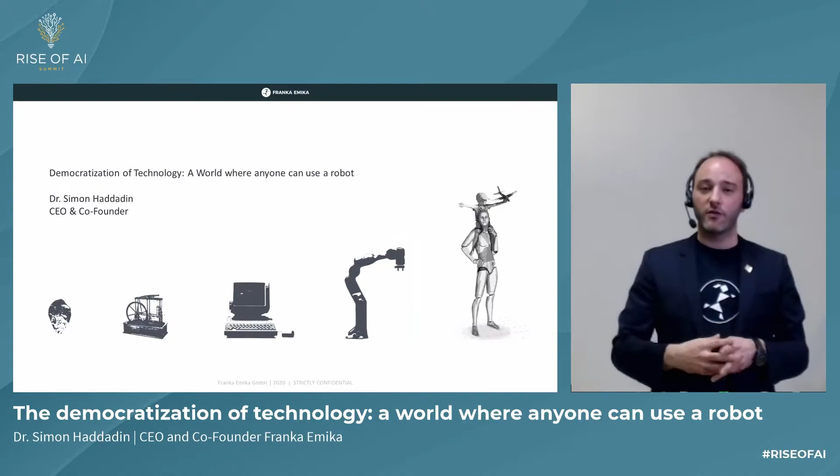And for that, I would like you now to start the video that I shared for you.

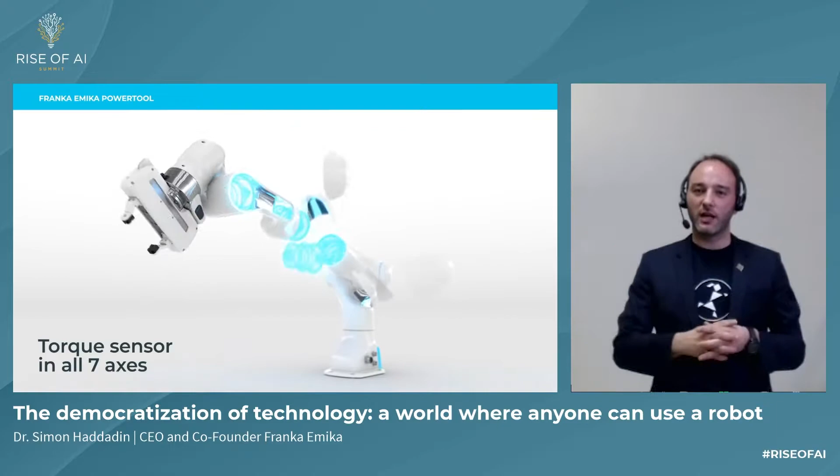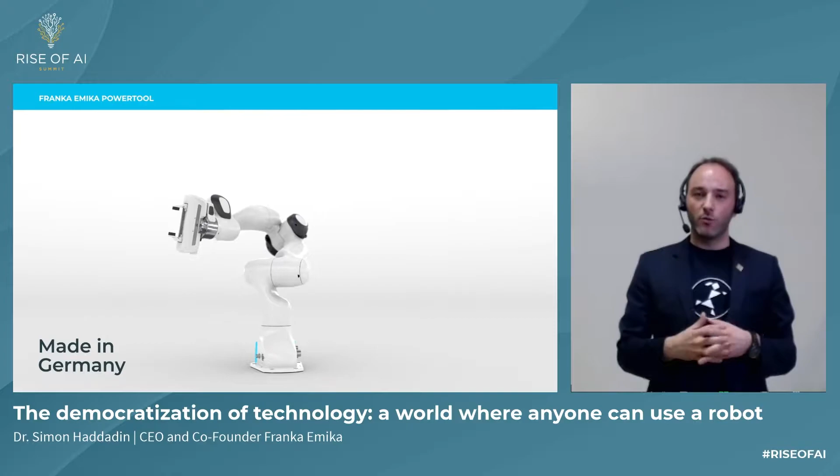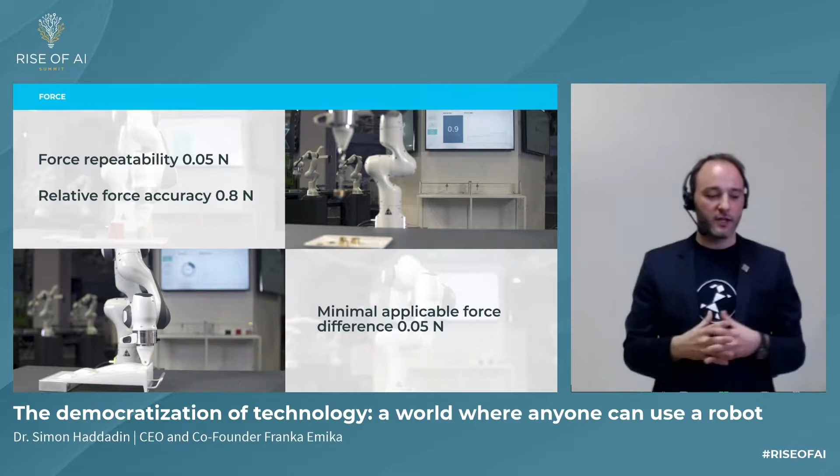It's running okay. So basically, we launched our very first product roughly two years ago, the world's first AI-enabled robotic tool. It has a completely new type of performance, I will show you a couple later. We designed, developed, and manufactured the entire system here in Germany in our manufacturing facility, basically where robots build robots. A robot is no longer a difficult machine that only experts and professionals can use, but we gave it a completely new software stack so everybody can now use a robot even in complex scenarios. The robot system itself is not only a robot, but the extension of the digital world into the physical world, and I'll show you in a couple of seconds what we mean by that.

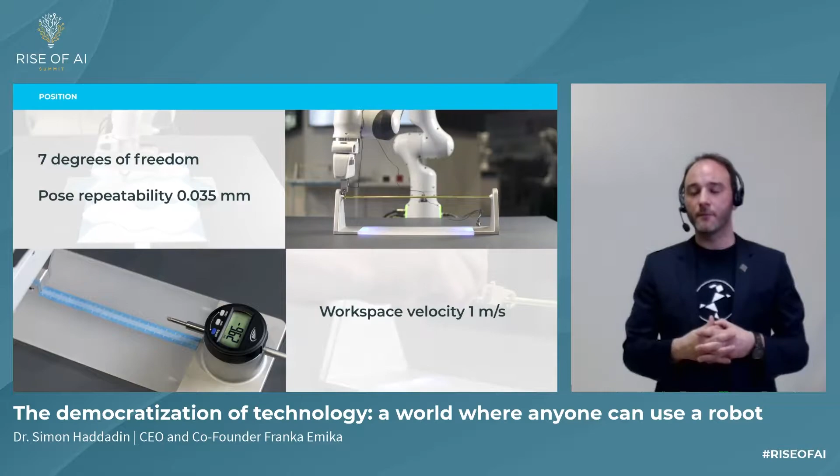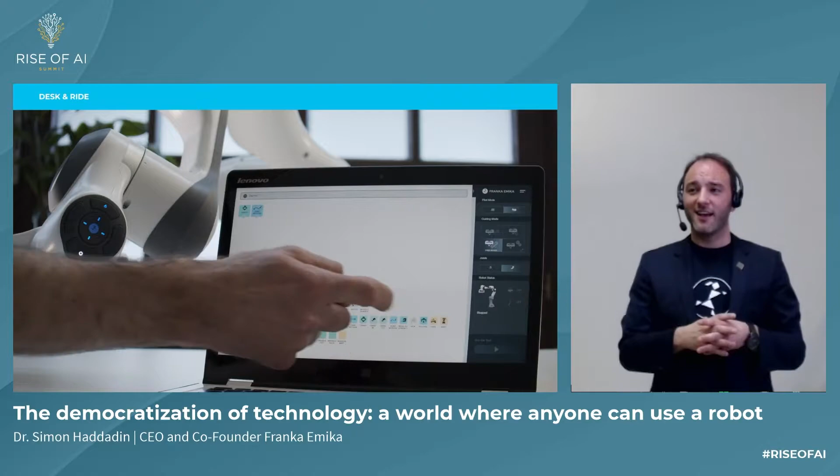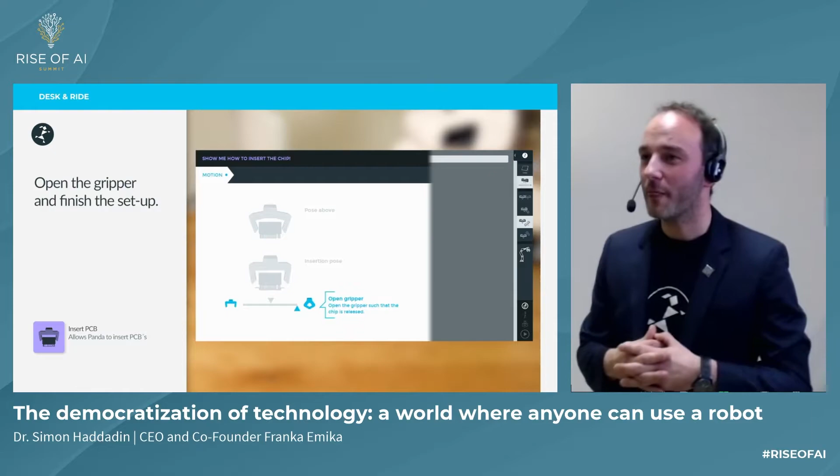When we started launching our product, we did not hear, we almost did not hear anything you were telling us because the sound of the video and the music was quite loud. So if there was important info, next time you should either mute the video or explain what you told us because it was very hard to understand. But the video was great. Okay, so right, I asked to mute the video, it's not a big problem.

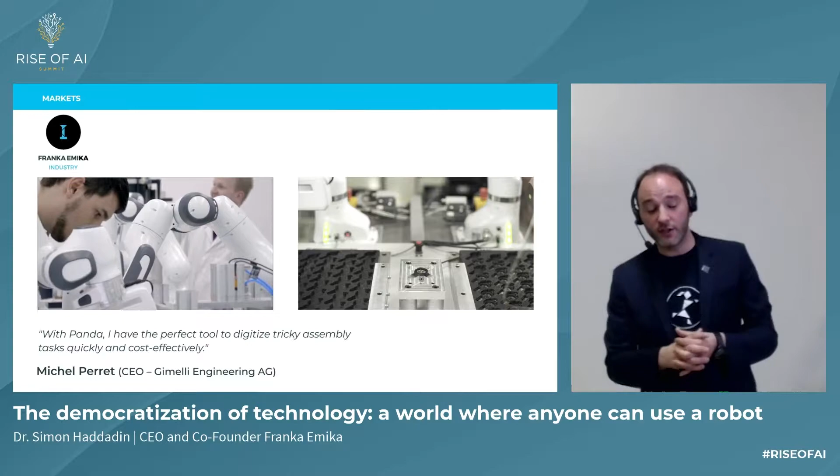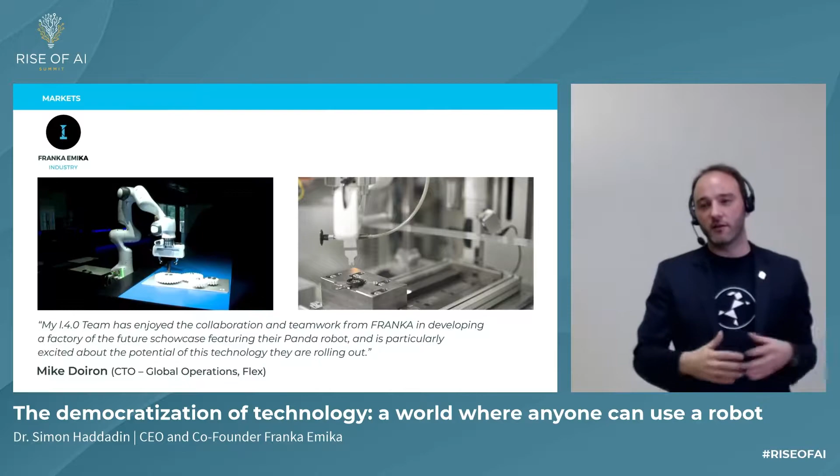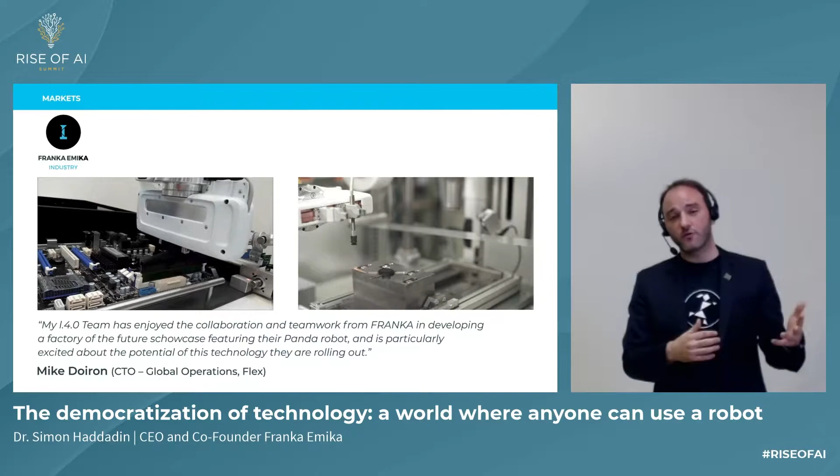So what I said in a nutshell is that roughly two years ago we launched our very first product, the first AI-enabled robot system in the world. We combined our skills in algorithmics and a software operating system with the highest mechatronic density, meaning the robot system is actually learning capable. You do not need to program this robot anymore, you can just teach it by demonstration, or deploy robot apps, which are tasks or features the robot has to do, and you don't need to program anymore. You can use our cloud system, Franka World, and download apps and skills onto your robot system, whether it's here or in Japan, it doesn't really matter anymore. By now, we are engaging with a large community, primarily industry, the disruptors, the educational space, and the academic space. Industry for us, the prime is 3C manufacturing, meaning consumer electronics manufacturing.

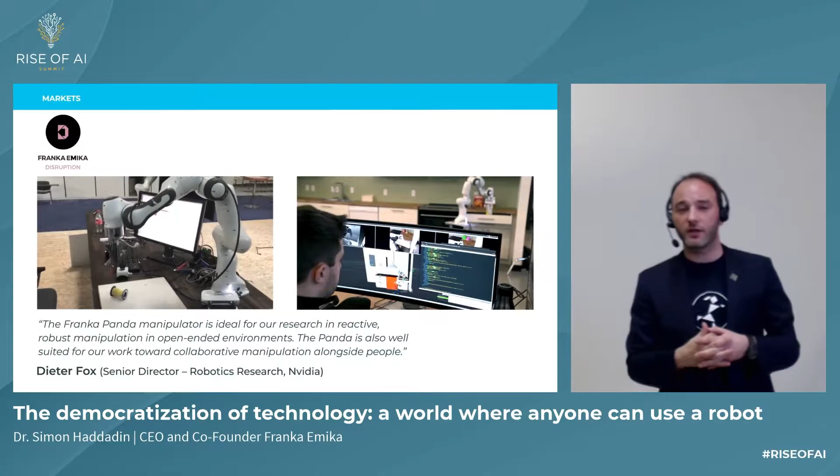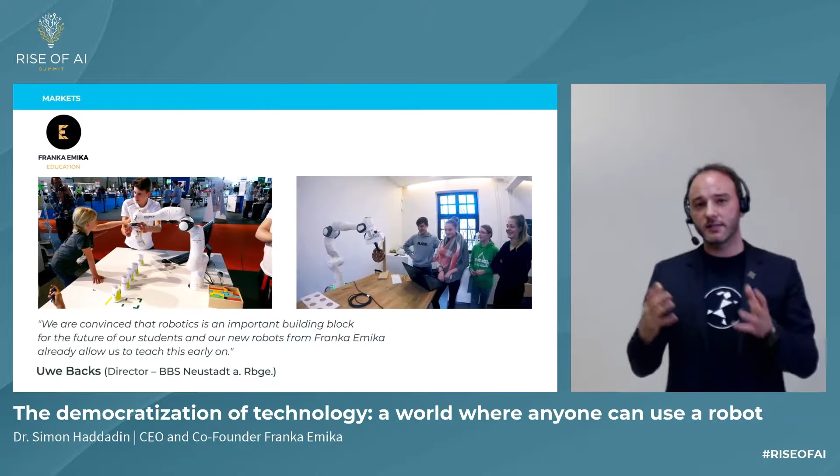Disruption space is basically what we are doing here. People who are trying to give robot systems new capabilities can use the robots for new applications in food sciences, in health, or in finding out how AI works in the real world.

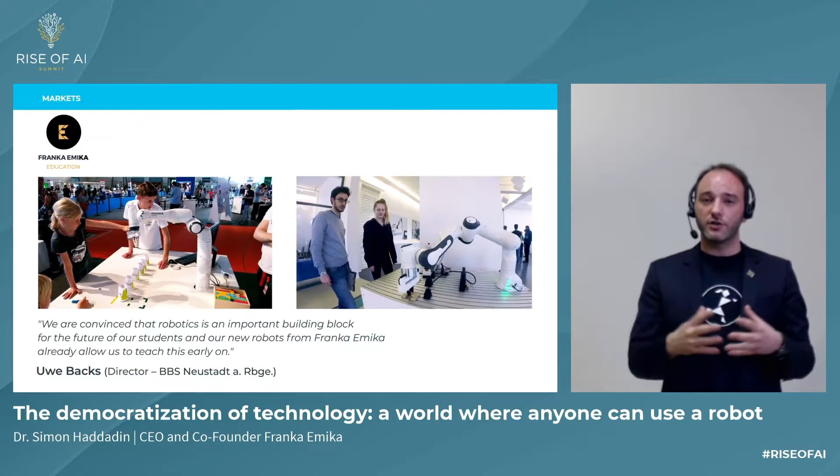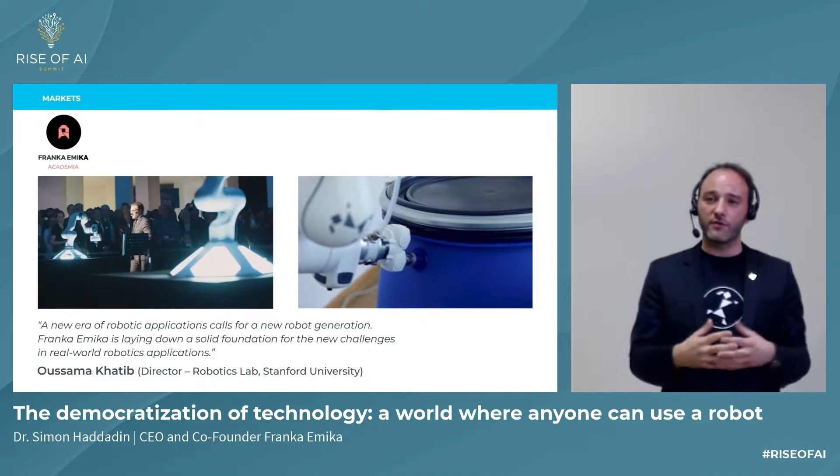Education is also very important for us, as knowledge in robotics is actually very limited. Only a few people have access to robots and to knowledge in robotics. So we partnered with educational bodies and non-profit foundations to bring knowledge of this kind into the general population.

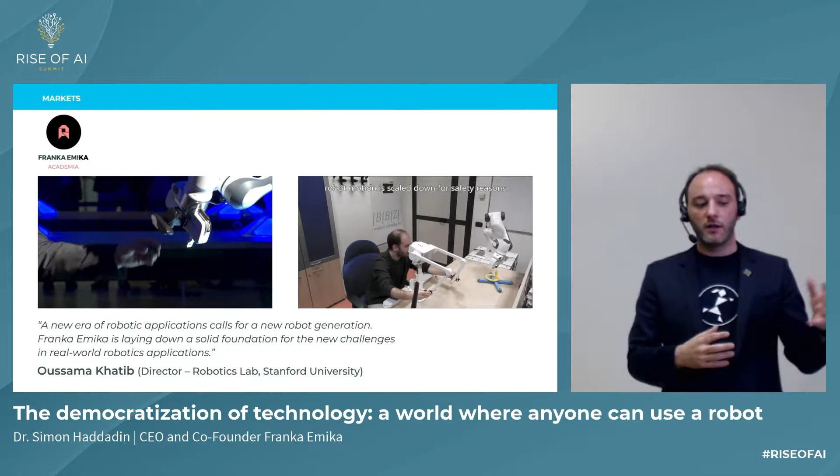And the fourth, the academic space, is basically our influencers, those people who know robotics best, who know control best, who know AI best. By now, the biggest labs like Stanford, MIT, Facebook, Google, etc., are all using our robot systems to understand and learn about AI applications in the real world.

Basically, what we are doing, to put it in a nutshell, is what Apple did in the computer space - that's what we're trying to do in the robotics space.

So what I just mentioned is what we're doing here is basically a fusion of software and hardware technology into a single product, which is very simple for most people, or all people at some point in time, to use. And why do we do that?

And then roughly 30 years ago, Mac or Apple came around with the Apple One, with the idea of a personal computer. By now, we see a world where everyone uses a high performance computer in their everyday life. Now, why is it that robotics is not on the level where computers are?

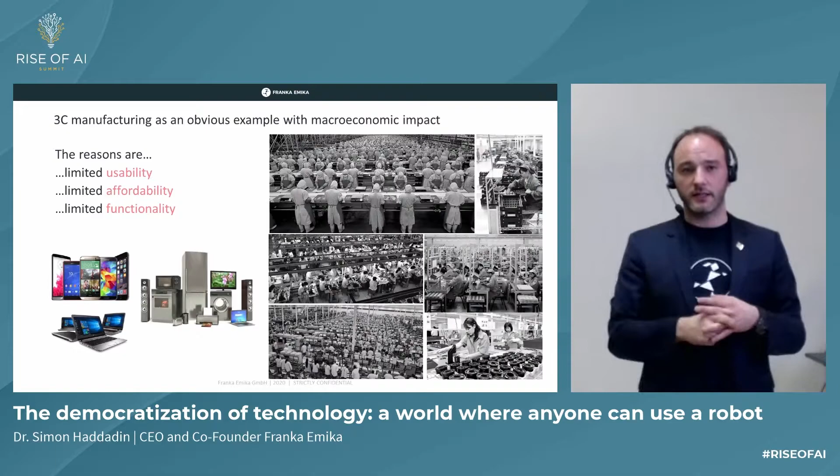And why is it not automated? It's not automated because robots are not usable, they're too expensive, and they're not capable of performing the tasks that a human can perform. And that is why we only know this type of industrial automation.

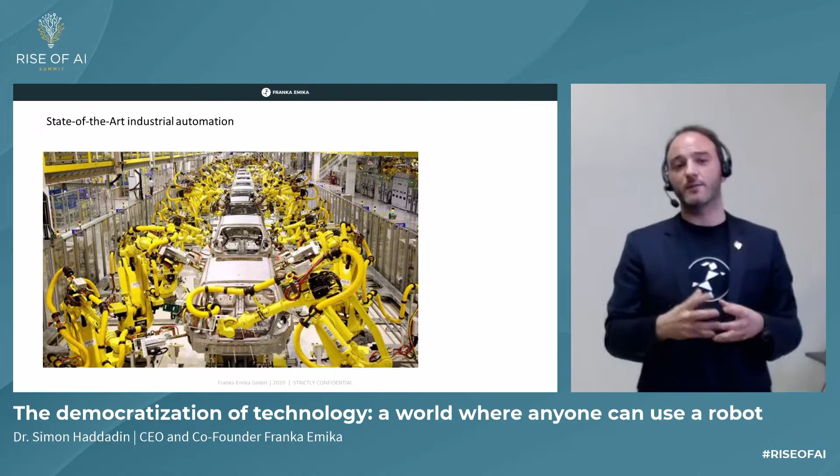Everything behind a safety fence, no flexibility, and those robots can only drive from A to B. They can paint, they can weld, but they're not able to assemble or test or grasp something in their hand. And that's unfortunately one of the outcomes.

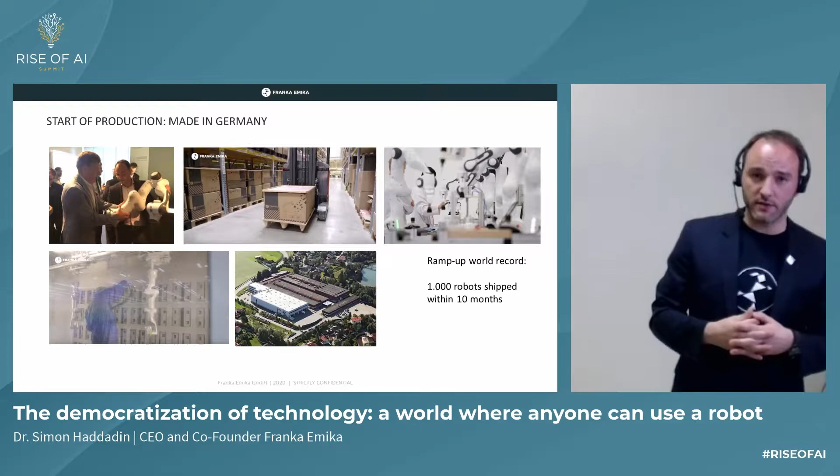What we have done, we basically built an ecosystem here in Germany. What you see there is our manufacturing facility, a former Nokia Siemens facility that we have reactivated.

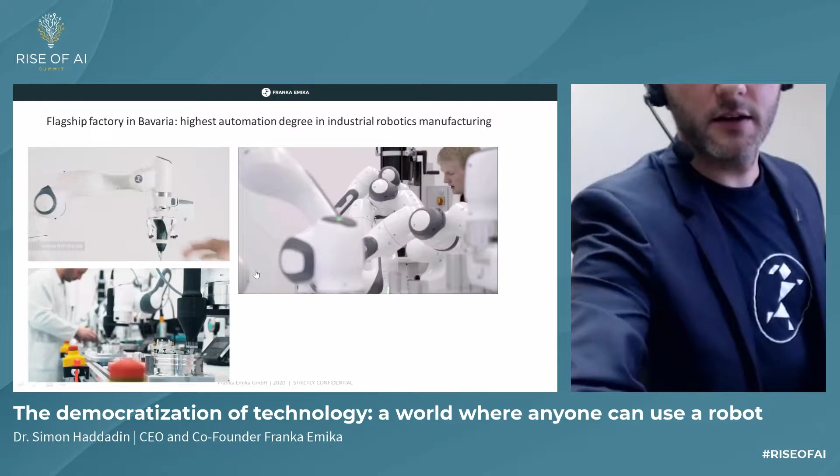What you see here is our manufacturing facility, where basically man and machine are building robot systems in order to be even competitive against low-income countries. We need to automate as much as possible.

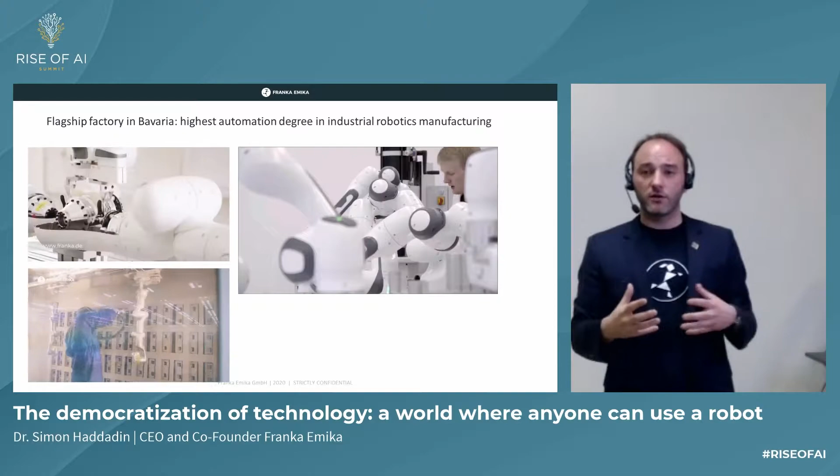Unfortunately, something doesn't work right now. And we're trying to give this technology basically to everyone so that we can deploy automation also here in Europe again, bringing mass jobs back, but only by combining man and machine so we are somehow competitive with low income countries.

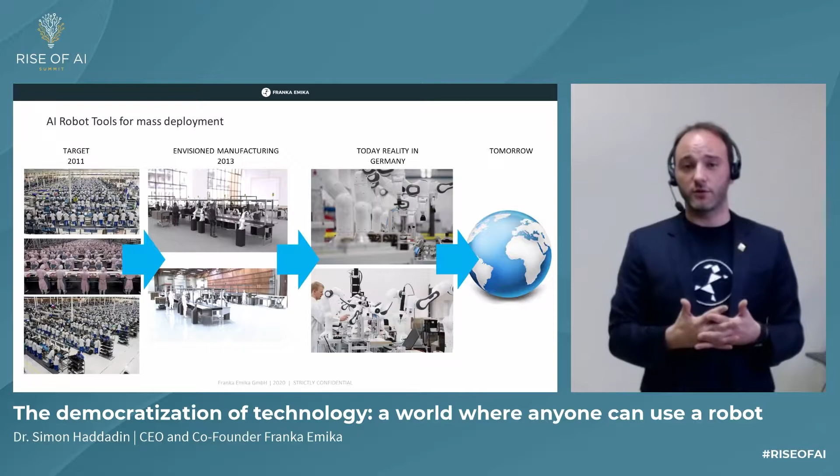Now, what we also know is what has happened over the past two decades or longer in those technologies in AI.

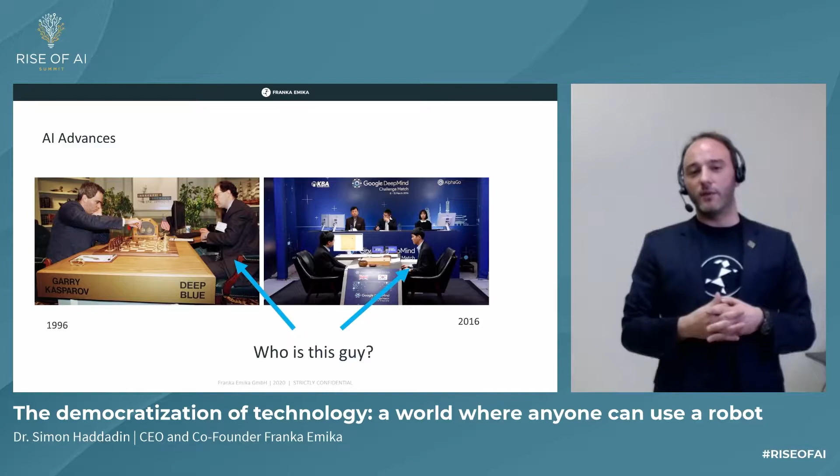But who the hell is this guy? So for some reason, we managed to build a brain that can do better moves than a human, but we did not manage that the system will also conduct the movement. So we put a person, a faceless person, to do the move. All we've managed at some point is exchange the guy who does the move for the computer.

But when we think about AI, all of us still imagine the science fiction movies we have in mind. We're thinking about Data from Star Trek, we're thinking about C-3PO, and we're thinking about Agent Smith from the Matrix. All of them have something in common: we believe AI is actually something happening in the real world.

Even if you take Agent Smith, he only became very powerful when he actually entered the real world and did not remain in the digital world. Manipulating the digital world is much easier than manipulating the physical world, and that's why you go to the next screen.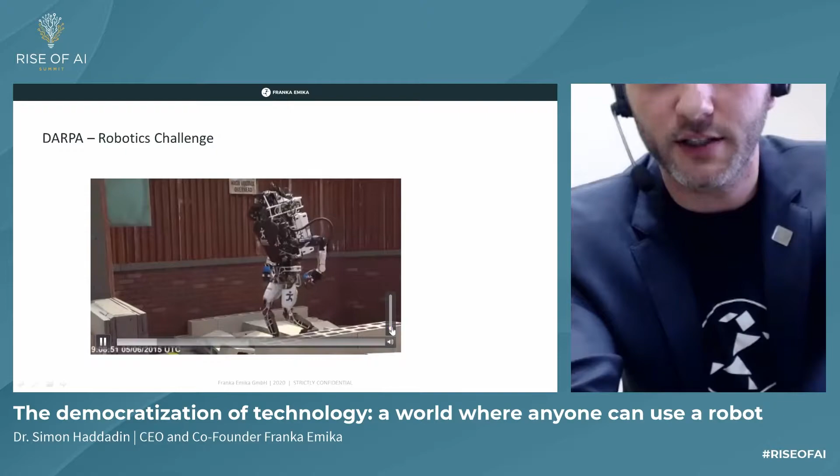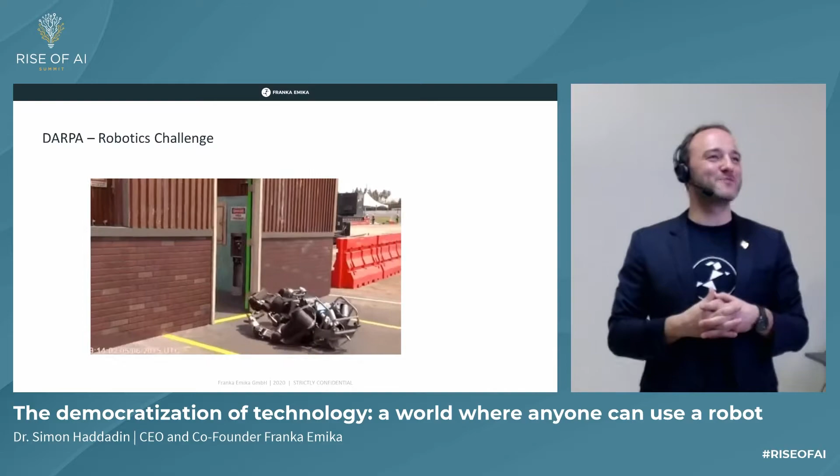So what we see here is the so-called DARPA Robotics Challenge, where we try to solve, with a lot of colleagues from all over the world, basically building scenarios of catastrophic, Fukushima-like incidences where we can deploy robots and sit somewhere in a safe space and control robots and send robots to solve our tasks.

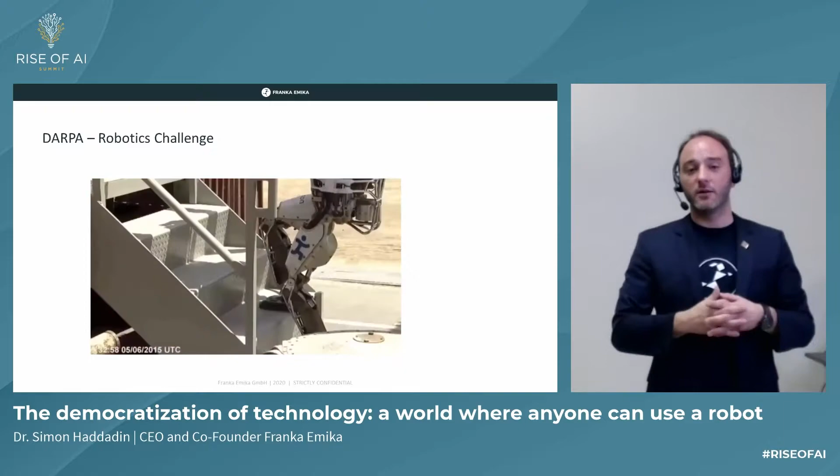But this is what the brightest minds try to solve, and what you see is that they cannot even walk on stairs. And why is it so?

Click what? One more click, please. The sound, I'm really sorry about the sound. We should have tried.

So what you see here now, what is the big difference between mobility and manipulation? I think, as we always try to use the human as a role model, it's the same in this case. What we see here is for millions of years, organisms were able to move from A to B.

But only primates are able to use the world and build tools to manipulate. Manipulation comes from manus, the hand. So only primates are capable of manipulating the world as they want to. And this is what we've been trying to do.

So in general, AI is something like sense, plan, and act. But why is it by now a common assumption that it ends on the screen and it's some major big data computer running in the background? We cannot do the transfer in the physical world, and this is what we are trying to do, and this is what you see here.

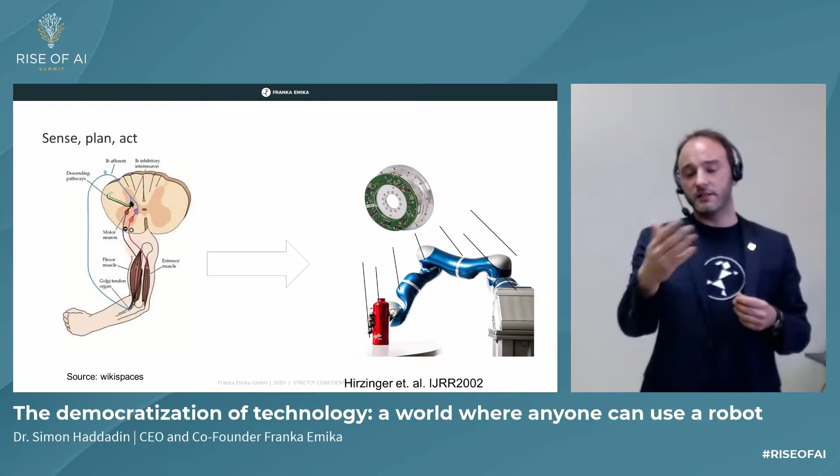The human on the left side with his capabilities, I can feel and I can use my muscles to manipulate the world. And this is basically what we gave robot systems. And why do we do that?

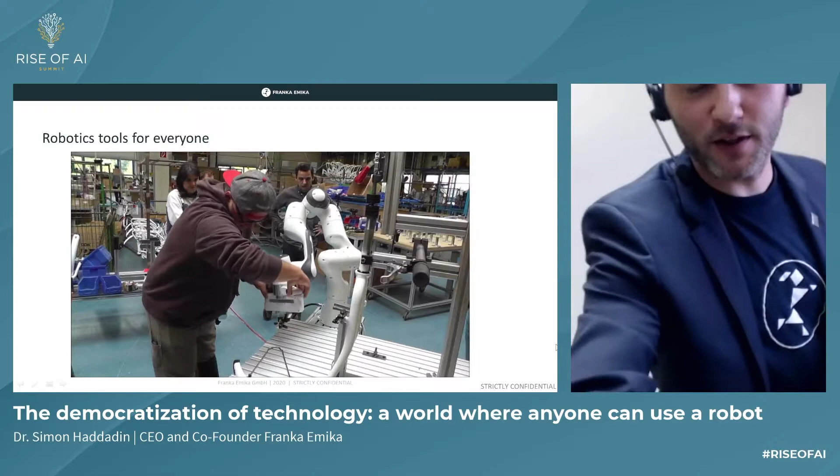Because we want to give another one. We want to give... I'm really sorry about the sound all the time.

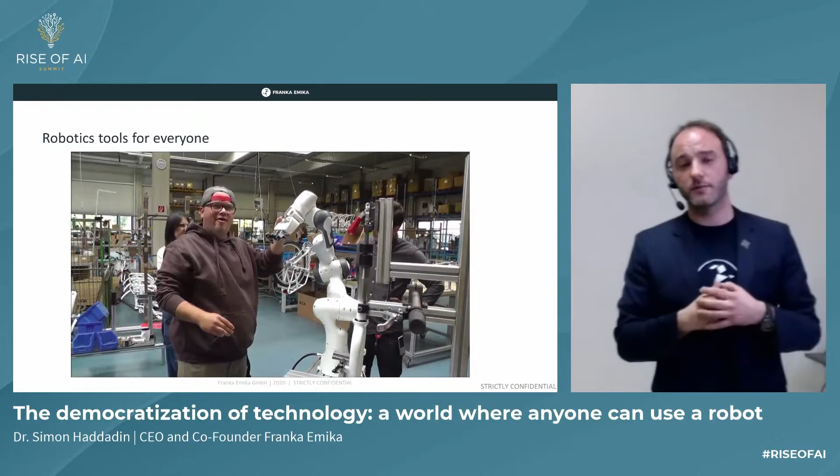So we want to give people a tool at their hand. What you see here is the bike manufacturer Puky, a children's bike manufacturer. In disabled workshops, actually, these bikes are being manufactured, and we can give now even people who have limited skills a robot tool that can help them assemble these bikes.

And what I would like to take you along now is a small demonstration of where we think AI does not end in the digital world, but actually brings it into the physical world. Basically, I will show you 3 steps. We will show you learning by demonstration.

So we can teach a system to do something and the system will conduct it. On the second level, we will show you how a robot system without any knowledge about the concrete task can learn itself how to conduct the task. And the third one is how can I give a collective learning, so the robot system in China, in the US, in Europe, it doesn't matter, can all share the knowledge and bring it onto a single system.

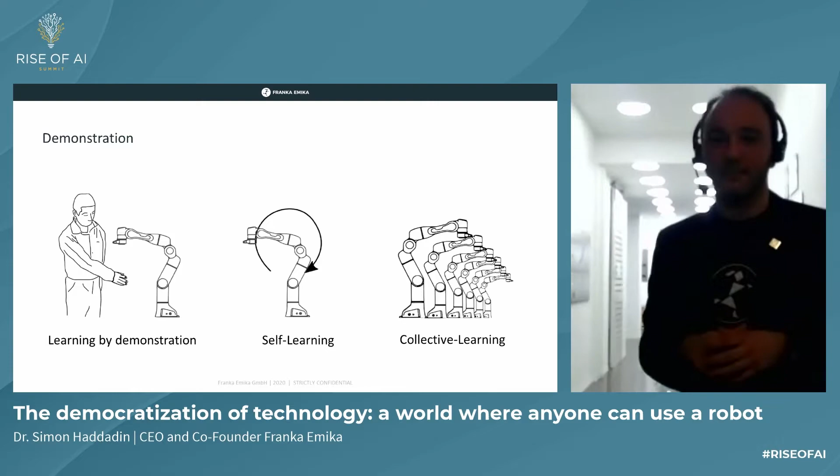And for that, we will go now into our lab. As I said, we wanted to be in Berlin, but we're trying to make this experience as hands-on as possible because robotics is hands-on. I wanted to bring a robot onto the Berlin stage, but we're using our lab for these days. So we are here in Munich, Schwabing, in our headquarters, and this is one of our major labs where we'll show you a couple of applications and skills that our robot systems have.

So maybe you swing a little bit. I hope everybody can see. You can see here a small fleet of robot systems.

This very first one is trying to follow a path. And what I can do, I can interrupt him. And even if I interrupt him, the robot system will still try to follow its path. Can you turn on collision detection?

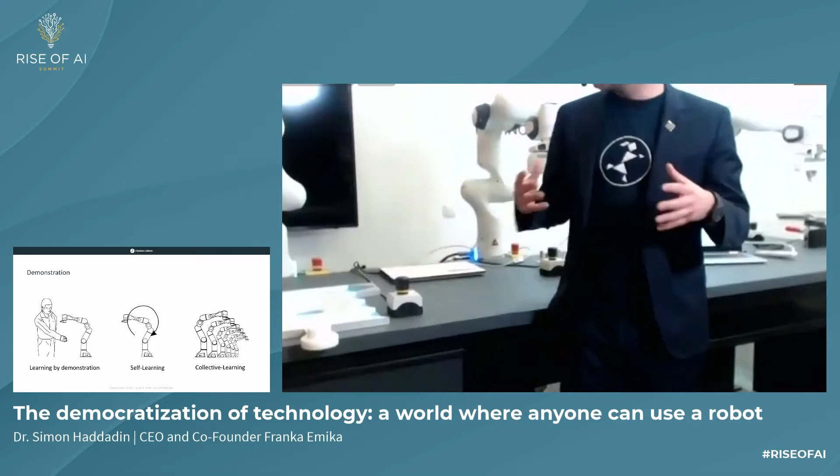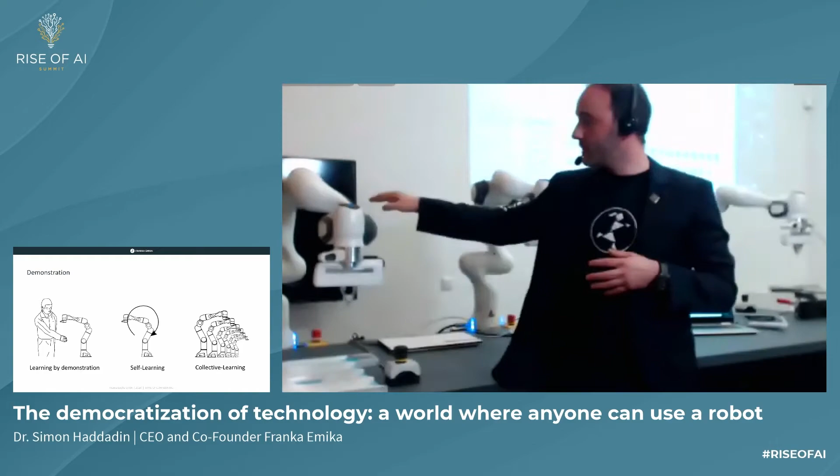One major skill that every robot system needs is to be safe to interact with humans. For that, we basically gave the robot a reflex that a human has: the sense of touch. So every interaction I have with the robot, it can feel.

Can you turn on zero G? Another capability is that this robot is not mechanically stiff, but like my human arm. I can have it strong or I can have it loose. This robot actually weighs almost 20 kilograms, but I can move it with my little finger because the robot compensates its own weight, which makes it very easy to guide and move around.

And why do we need these skills? Sense of touch, collision detection — for manufacturing purposes, we need these things to conduct these tasks. I hope everybody can more or less see what we're having here, but these are typical tasks from electronics manufacturing, and I will show the robot how to insert this plug.

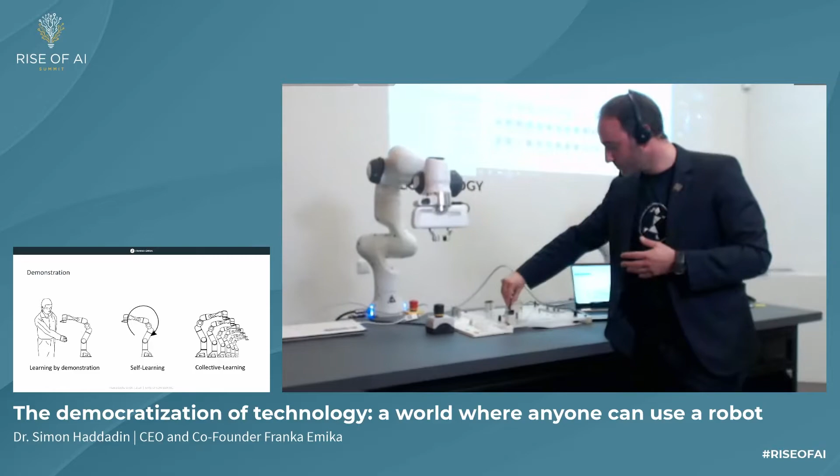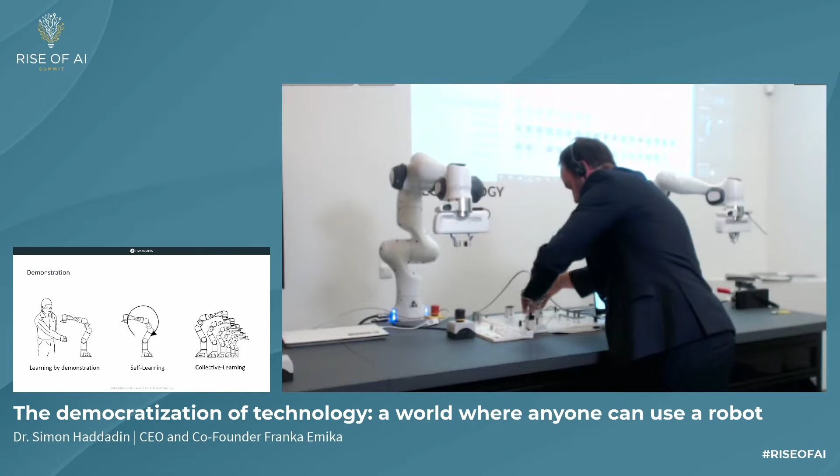Or this plug, and taking them from over here. I'm not sure if you can all see in the background.

Maybe if you lift it up a little bit. I don't think anyone can see it properly, but this is our programming interface. You don't need any code anymore, any special computers — through the browser, we logged in onto the robots. So we don't need any special computers anymore.

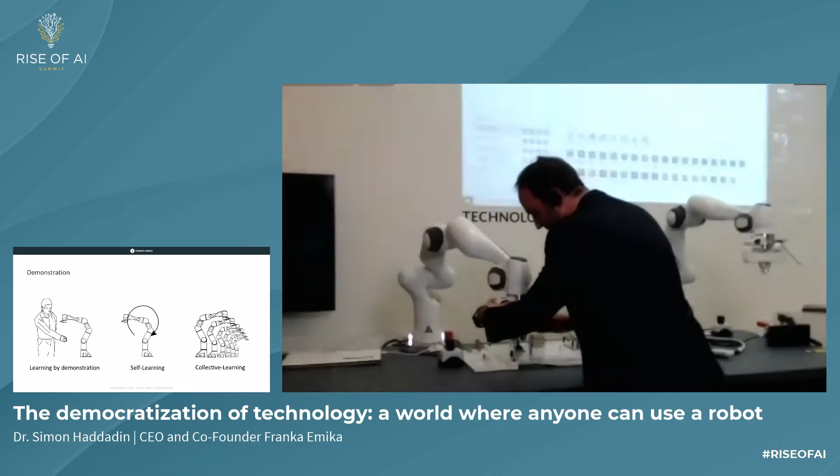What I do now is basically show the robot how to insert this plug, and I will show the robot how to insert this plug.

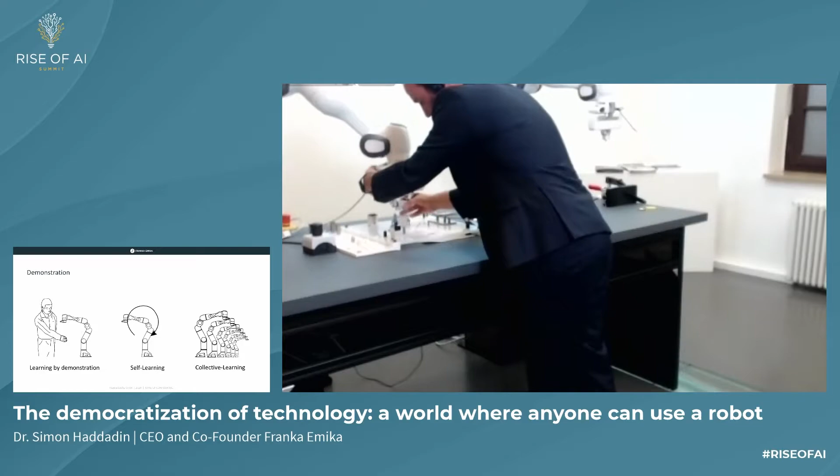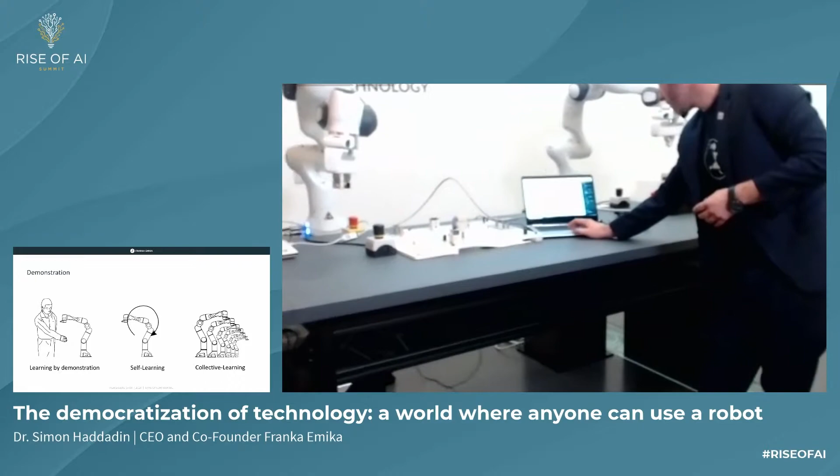Now, if you can, I'll push play. I will put these over here. And what you will see now is that the robot will try to do exactly what I just showed him.

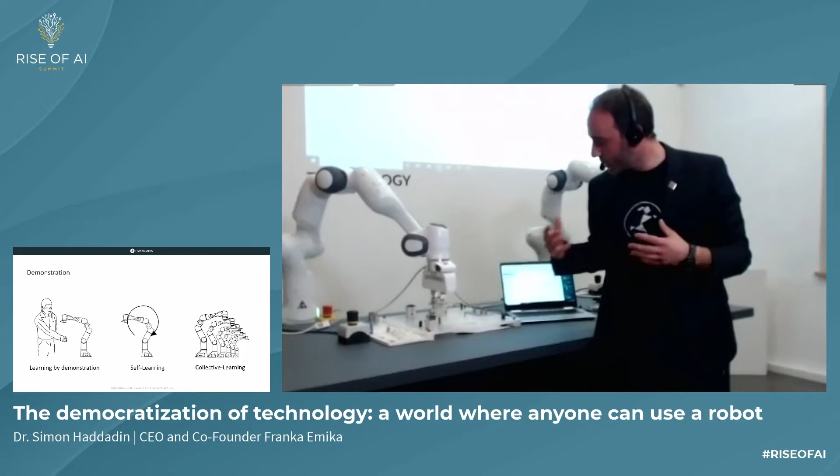He's picking up this very complicated plug. What you will see now is like a blind person — he's trying to wiggle this plug in until he reaches the goal that I just showed him. You can still see those wiggling motions. And now he managed to insert it.

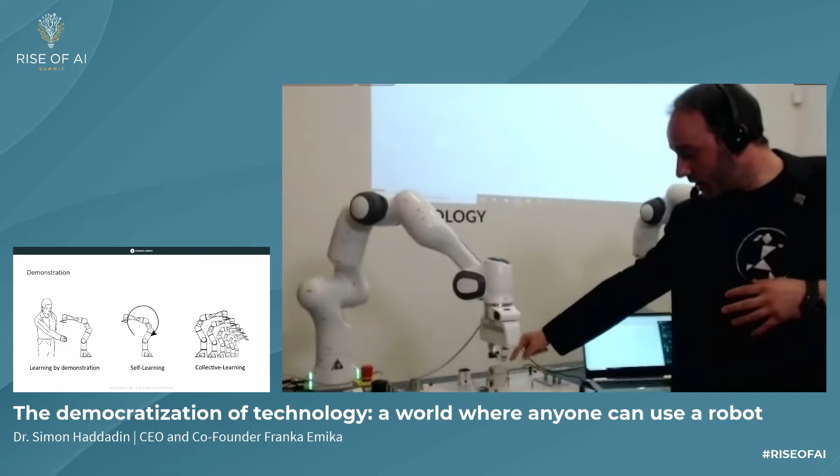So he's moving backwards, and now he's picking up an Ethernet plug. Oops, it just turned off itself. Oh no, now he's... huh?

That's how we know it's live, yeah? Now, where is the Ethernet? There it is.

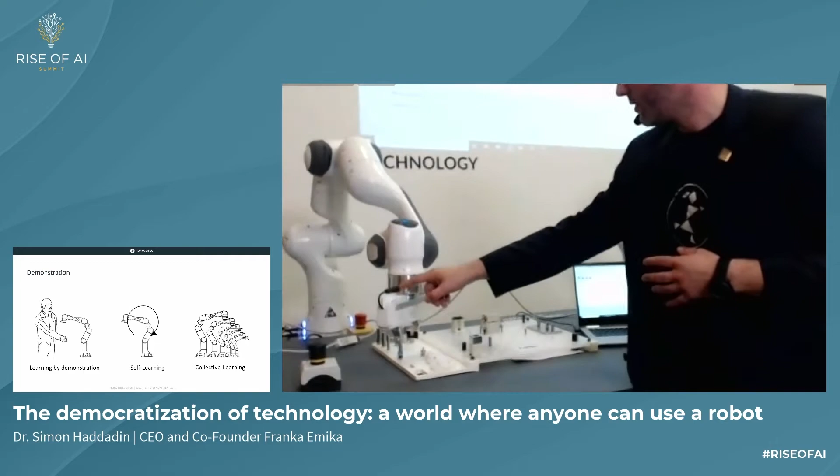Simon, while you're trying to start it again — will he always have this little janky motion that you showed him, or will he be able to optimize his movement after you showed him once?

Okay, then let's continue to the next room, I'll show you right away. Basically, what the robot used here is inherent capabilities that somebody else gave him already, and he will try, with the capabilities he has, to solve this task.

Now we will show you where he learns how to solve these tasks, and that is what we basically call self-learning. To conduct these tasks, we will go to the next station.

Let's show this real quick. What we see here is a couple of assembling robots, basically testing and assembling iPhones and packing them for shipment.

We have to move a little bit further, I'm really sorry. Now turn a little bit — what we see here in the background is a computer assembly, where 3 robot systems are basically assembling a computer.

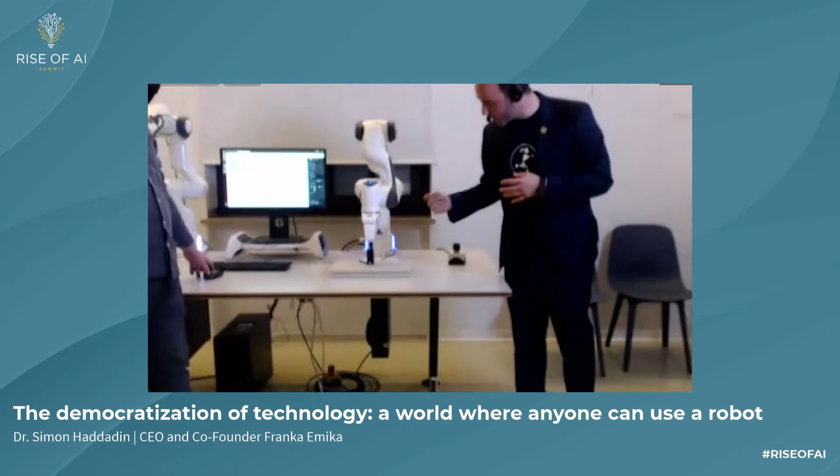Now I'll show you how the robot understands and learns how to conduct this insertion. Come on, play. So what we see here is the robot wants to insert this USB-C port connector into this socket — it's a USB-C insertion problem. These are the biggest problems in automation: how to insert objects.

What we see here now is that this robot is trying to insert it using different strategies. He's using force data and motion data to understand how to insert this plug. This knowledge can then be transferred to either this robot or another robot to perfectly insert this specific USB-C plug.

What do we do now? You have trained? Yes. So we have trained now, and now let it play. So basically, no more programming. Nobody is sitting around programming here, but the robot is basically learning itself.

Now you saw it went in right away because he understood what is the best strategy to insert this plug. He will do it just like a human when you're in your hallway and it's dark and you're trying to insert the key into your lock. That's exactly what this robot is trying to do here.

Now, maybe another one. What we can show you now is monitoring. The robot understands this is my perfect way of how I will conduct this task. So every obstruction, every difference in this way will be felt. Even if I put a balloon here, the robot will feel this balloon, and I can restart everything just by touching him.

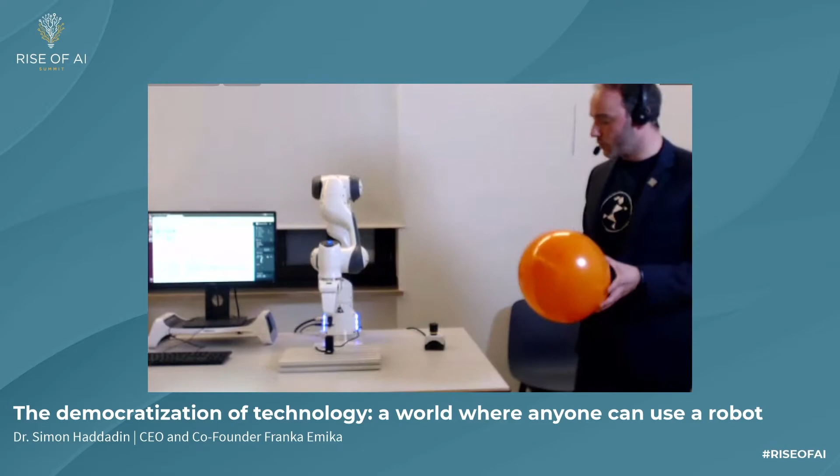And then he will conduct his task again. I can put this balloon anywhere, it doesn't really matter. I can put it here, I can put it there. The robot has a sense of touch all over the body.

So that means the process we want to automate will be much more robust, and the task will be conducted very fast. Now, we still have to program a robot by using different apps we give the robot, but sometimes it's a bit difficult to know what apps do I actually need. And this is what we'll show you here now, is understanding.

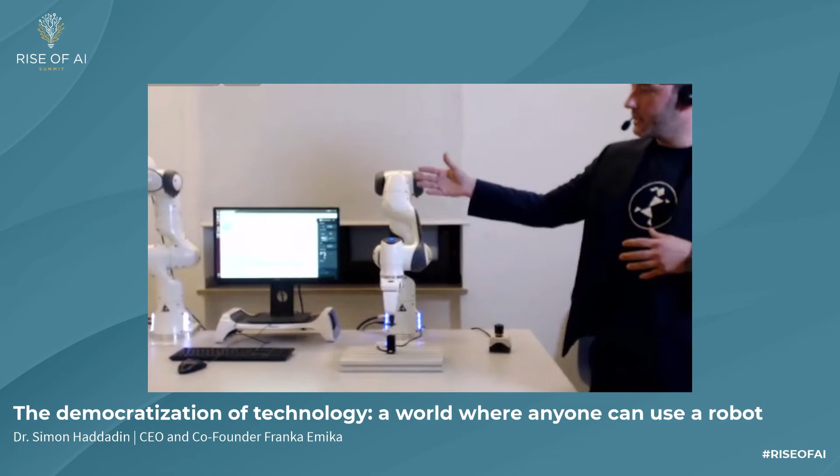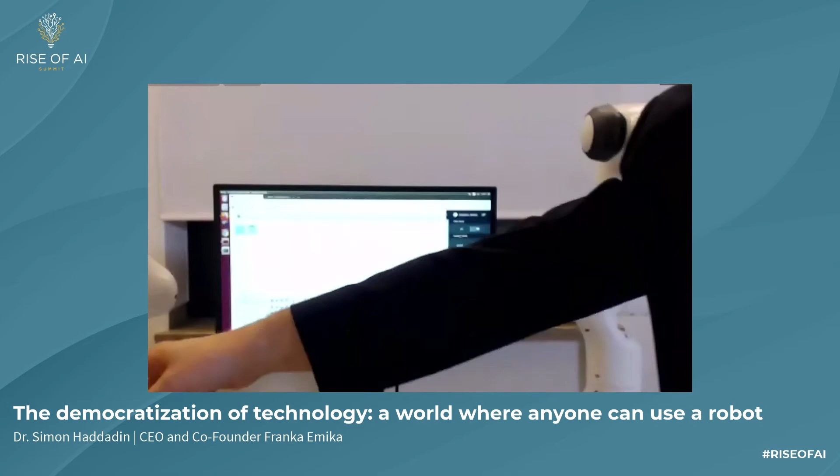Can we zoom in on this screen as close as possible? So what you see here is basically the dashboard of the robot. Now our colleague will basically show the robot what to do. Usually you have to pick the apps into your timeline.

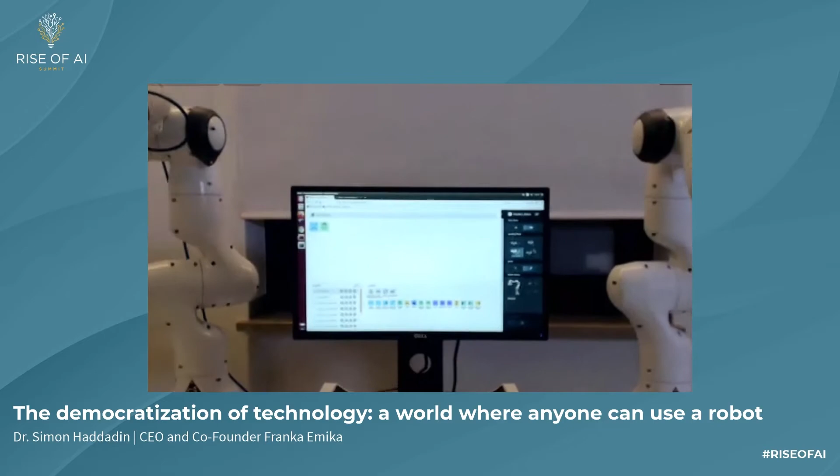And now go a little bit backwards. Now please teach the robot. This is the second level of learning by demonstration. So nobody needs to tell the robot anymore what apps he will use. He will understand by pure guiding what happens here.

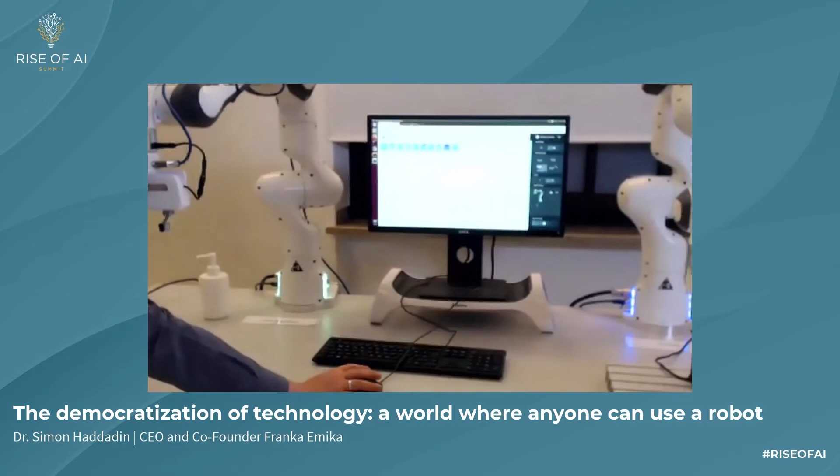And he will accumulate and segment by understanding the process and put them into modular building blocks by himself. So what we just saw is that automatically, just push play, this timeline filled up without anyone telling the robot what to do. He just understood what he has to do. Then we can conduct the task, and the robot will grasp the object and put it where it was shown to.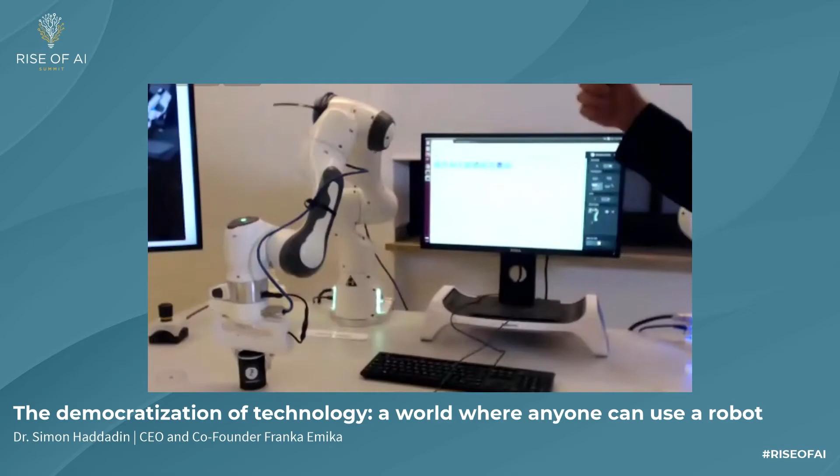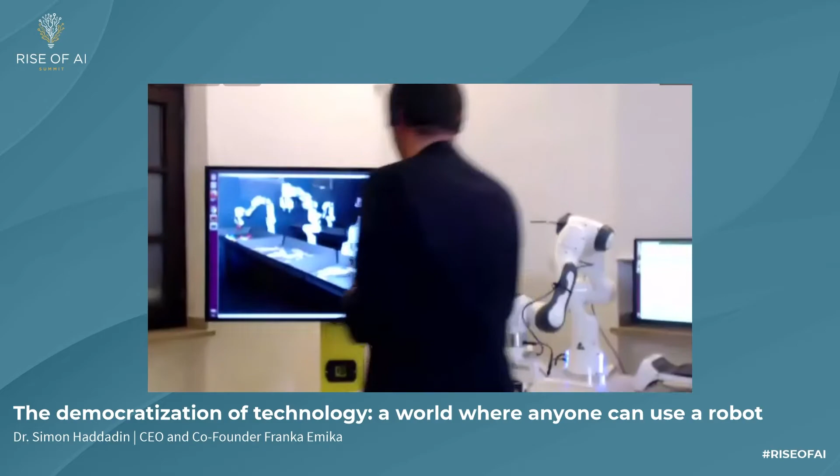So what we saw before was we have to give the robot the apps that he needs to know, but now we don't need to do this anymore. The robot understands himself. Now a quick view on the picture, what you see here is basically where a lot of this data is accumulated. It's basically a robot farm where constantly, all day long, robots are trying to see and grasp objects.

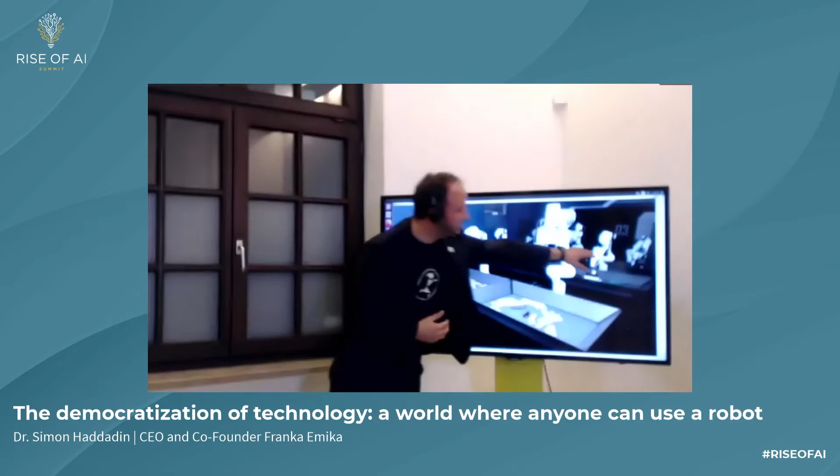We have here stiff objects. We have in the back compliant objects like toys and stuff. And in the middle, we have insertions. So that's basically where we generate this data so that the robot systems understand how to conduct and how to solve different tasks. Now we could go back onto the demonstration, to the next slide please.

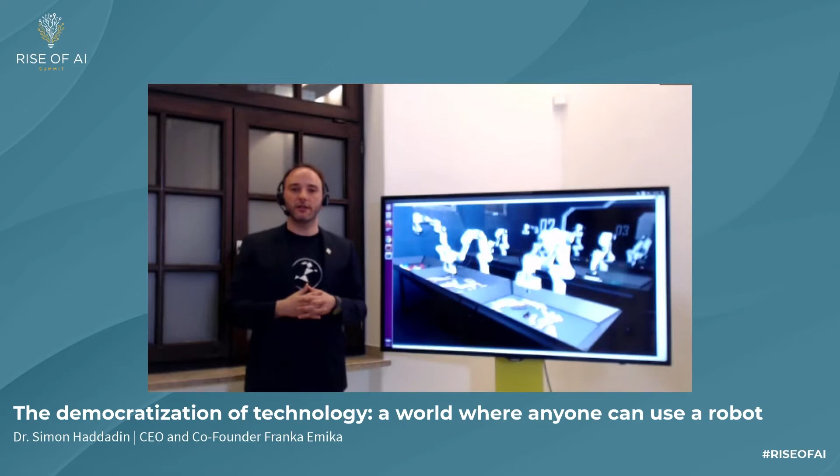Next one, the same accounts for healthcare. We are exposing our healthcare professionals all day, every day to a potentially deadly disease instead of using robots that can actually do the task, that can actually take the nasopharyngeal swab so that our healthcare workers don't need to do that anymore. Another system failure.

Next one please. And even at home, we are having so many people that are stuck at home. Nobody takes care of them anymore because they're not allowed to do it anymore. So robot systems again can help us to engage with our elderly, to help them, to assist them in taking their drugs, taking their food, and again, everything ends on the screen, but we do need physical agents to close this gap. Next one.

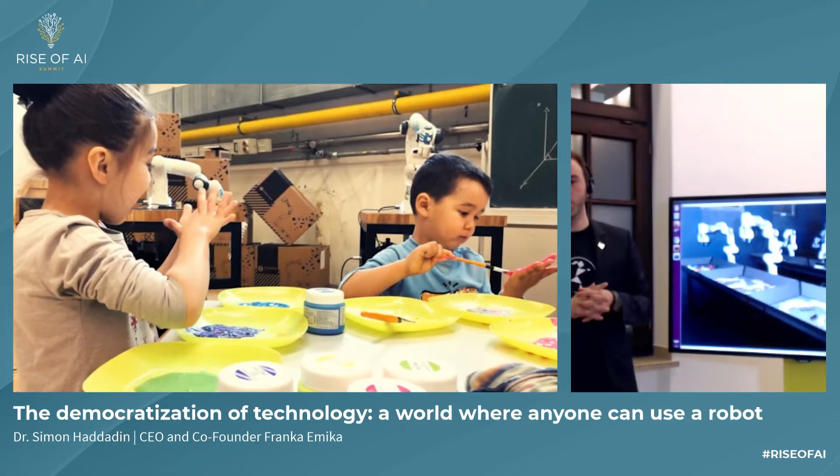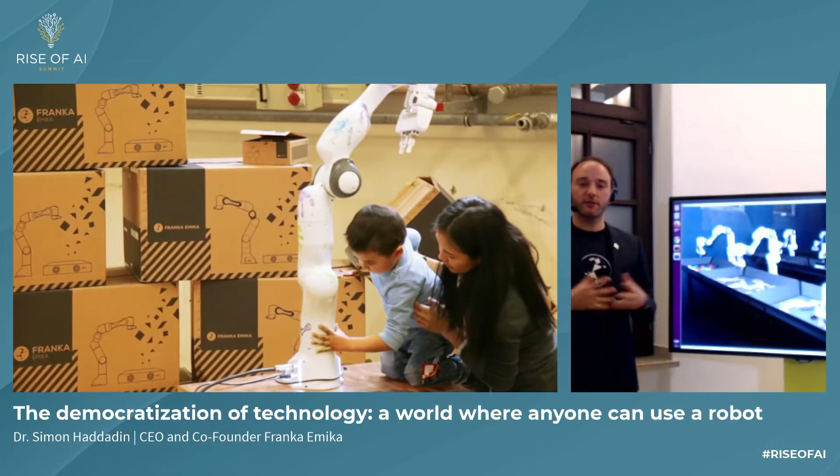For that, I would like you now to start the other video I uploaded to you, because one major thing in robotics and in every technology is to bring this knowledge to everybody. What you see here is now a glimpse of what we're doing. We're trying to teach and bring this knowledge to even the youngest people, so we can create an entire generation of robotic natives, similar to digital natives, but then not just ending on a computer screen, but actually interacting, bringing these things into the real world. Now go on to the next slide please.

Not only on a gaming level, but we actually created together with the Industrie- und Handelskammer, the professional training facility in Germany, courses for everybody, so we can bring this knowledge not only into homes, but into schools and industrial training facilities. From there we can scale from trainers to learners, and they can bring this knowledge into their work, whatever it is they do.

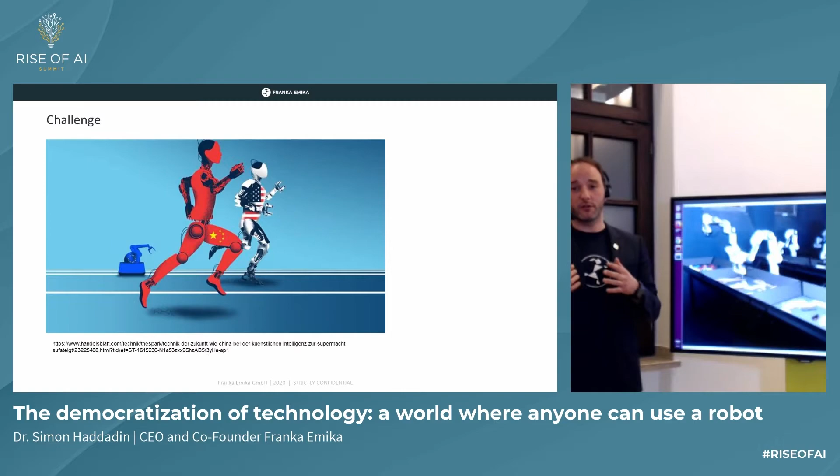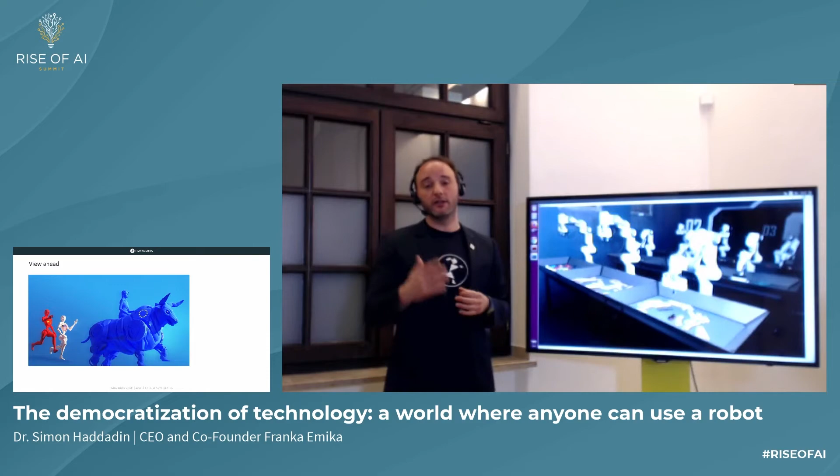Now, if you remember this image, this was from Handelsblatt. We see there is a lag in Europe against China and USA, but we don't think this accounts in robotics and mechatronic systems, which are the bridge givers between the digital and physical world. That's why we made a counter image. We believe in mechatronics, in cyber physical systems, Europe is not behind, but actually number one. If we manage to train our people, make systems affordable, usable and safe, then we can go from being a factory assistant, which is current reality, to service applications in health or food, and at some point bring robotics into everyday life.

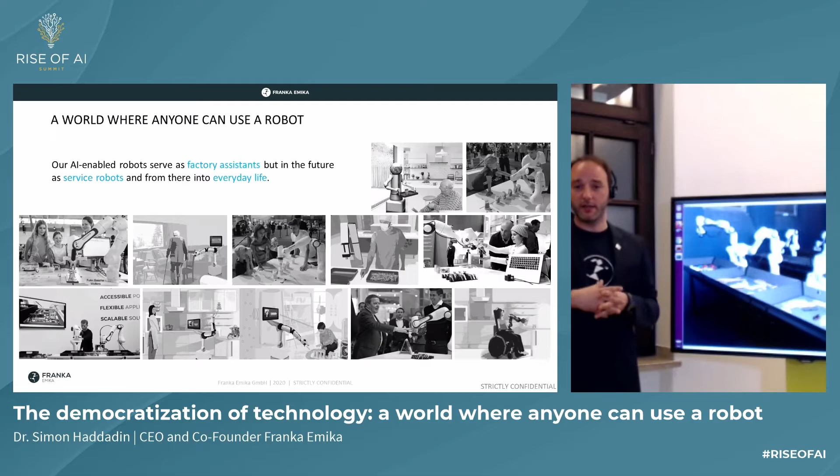Thank you very much for your attention. If there's any questions, I'm very happy to answer everything.

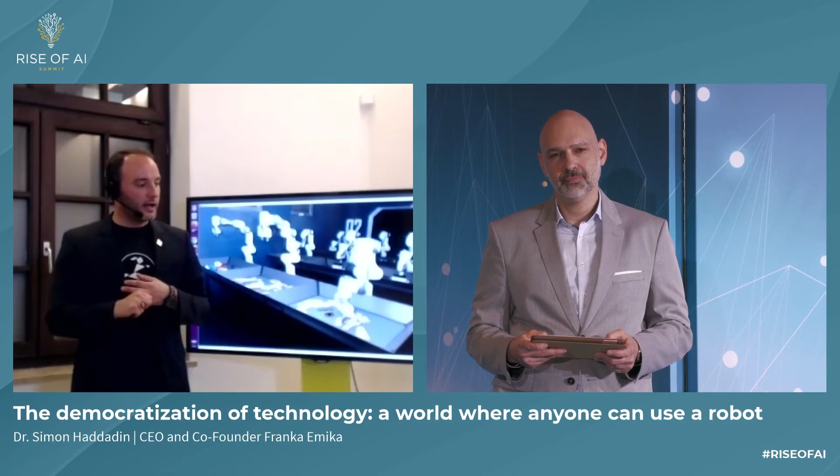We can use MATLAB Simulink, which most people from control and automotive engineering know, or you can use—we have a partnership with NVIDIA's SDK, called Isaac. So you can use basically all common programming languages to operate the robot.

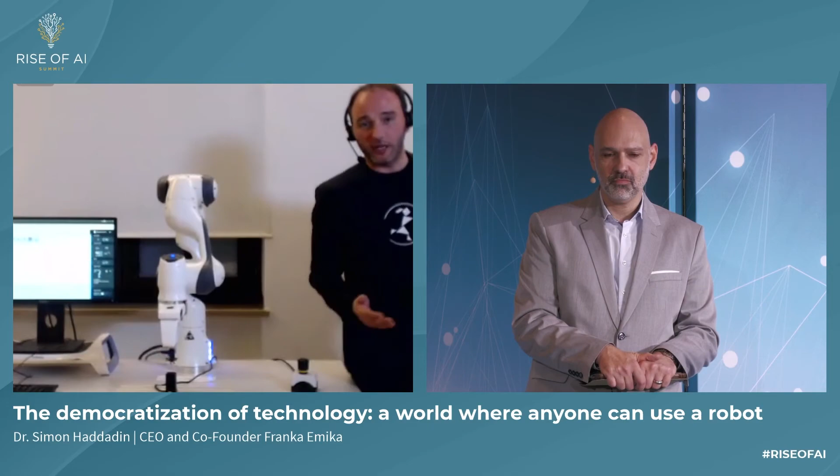Another thing we can see here is actually a new gripper, which basically has the same sense of touch capabilities as the robot already has. So these are a couple of new things that are coming up.

Very clever solutions. Now it's time for my questions, and they are quite brief—one is the rock band question, and the other is a startup question. The rock band question first.

Where does the name Franka Emika come from? Why is this a rock band question? I was thinking, because we always ask rock bands where their name comes from. Oh okay, I thought you were going to ask me what's my favorite rock band.

Okay, no. So Franka Emika is basically—do we have a logo somewhere here? This is Franka. I don't know if everybody realizes, but it's a girl with a ponytail chasing a ball. This girl—because the logo existed first and needed a name, and we wanted a German name that is understood everywhere in the world. We are a bit older, so at the time Franka Potente was still a well-known name, though nobody knows her anymore now, and that's where the name came from.

And of course there are personal connections, but I'd like to share those maybe in a biography at some point. Right, great, interesting—you see that was also a rock band answer.

And now for the startup question: what are you looking for at the moment? Are you looking for funding, customers, partnerships, employees? What are you looking for? Probably you can check everywhere.